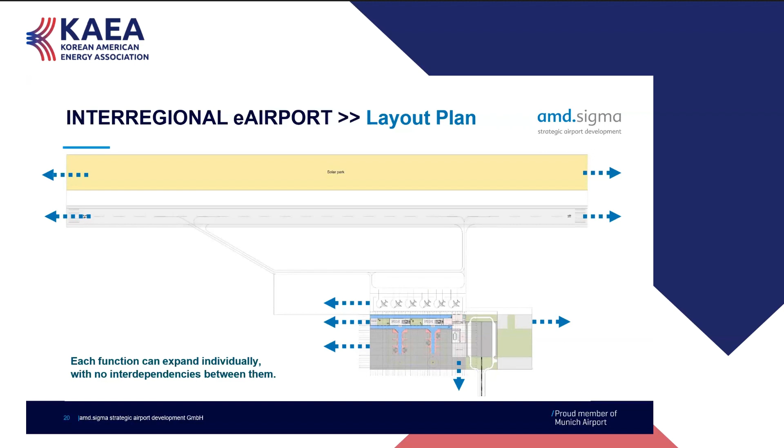Next slide please, and that's how it looks. You have a big solar park, a runway of about 1,000 meters, and on the bottom you see a terminal building that combines a vertiport and an airport. That's the first one that has ever been designed this way worldwide, so we're quite proud of it. To the right, you have either an airport city or a cargo city, because we believe you can have passengers during the day and cargo during the night, and you get a much better business plan with that.

So that's pretty much how it could look, that's basically quite a lot. But you can start small. You can start with half of the terminal building for the passengers, and also start with only very little for the cargo, and just go piece by piece and let it grow.

So we have about 12 eVTOLs that feed the passengers from the big city into this airport, and we have 6 positions for electric planes that can be 9-seaters, 25-seaters, up to 40-seaters. That can host anything between 300,000 and 1 million passengers.

So last slides, there are a few impressions from the inside. Maybe next slide.

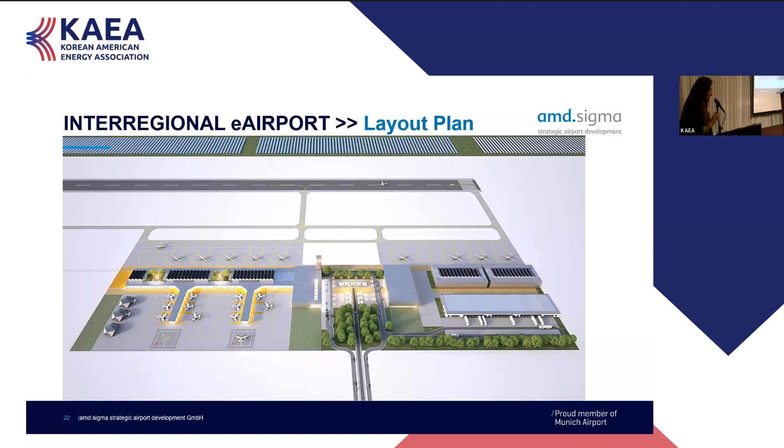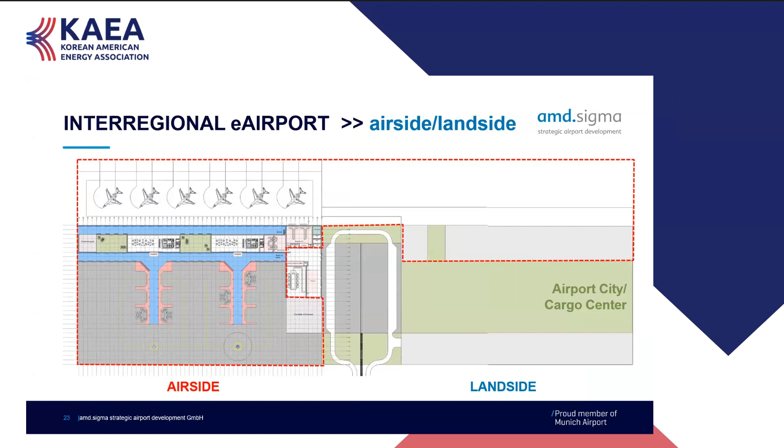Next one, please, that's just the diagrams. Maybe if one is interested, you can get the presentation later and look at it. Next one, please.

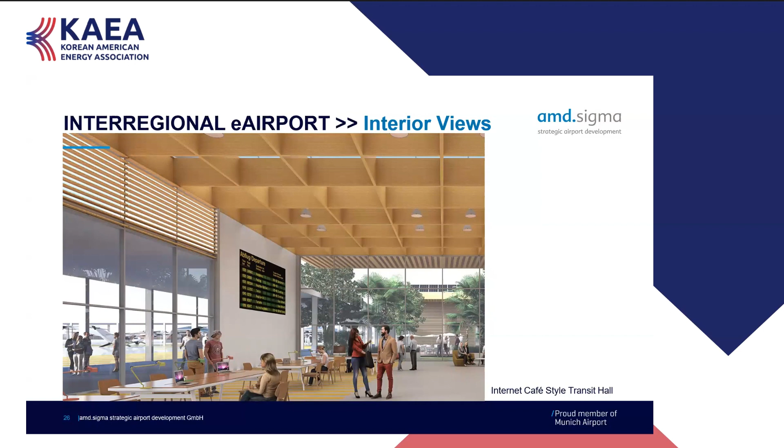Next one, I just want to show these interiors. We want to build this as a wooden construction. It's all on one level. There's no escalators, no elevators, no pushback. It's basically a very simple building with inner yards that are green, with open spaces and natural ventilation. Next slide, please.

And that's basically my last slide. So basically, that's how we imagine this terminal to be, an open space that looks more like an internet cafe than a conventional terminal. So that's pretty much what I have to say.

I hope I'm not too much over time. I'm sorry to talk so much. I hope you enjoyed it. And if there's any questions, please ask.

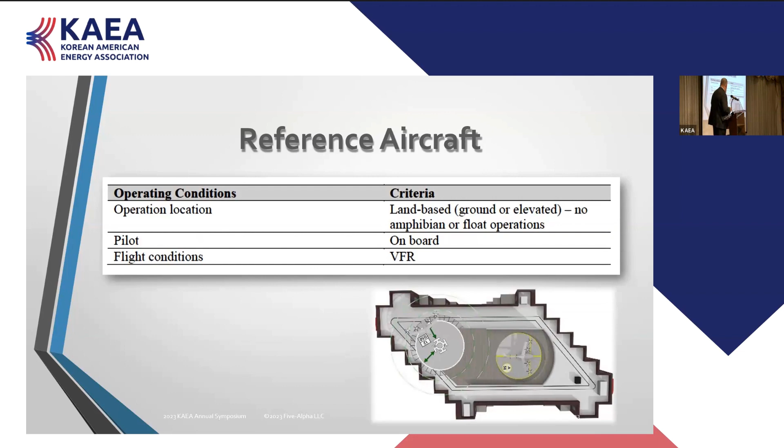If you don't know what hover out of ground effect means, it's a performance classification for helicopters under the certification requirements in Part 27 and Part 29. When a helicopter or eVTOL is close to the ground, the airflow gets resistance, and as that resistance pushes back, it requires less performance from the aircraft to hover. Once the aircraft leaves that area, it gets into what we call out of ground effect—rule of thumb for helicopters is 1.5 times rotor diameter—and you're into a higher performance requiring area for flight.

So that's one of the things we pointed to in the eVTOL: if you're landing out of ground effect in normal operations, it must be able to have that performance level, quantified as being able to take off vertically and land vertically.

The downwash, outwash is something we're looking to measure because we're not sure what that is yet—what's the velocity from the aircraft itself, and what's the impact on its environment? There's also the wake turbulence that the aircraft produces. We know heavy jets produce wake turbulence that we want to avoid, but there's also wake turbulence created by helicopters that you don't want to fly through.

The rule of thumb the FAA came up with is about a 60-second separation for light helicopters and about a 90-second separation for heavy helicopters, again using that 12,500-pound threshold. We don't know what that is yet for eVTOL—we haven't studied that.

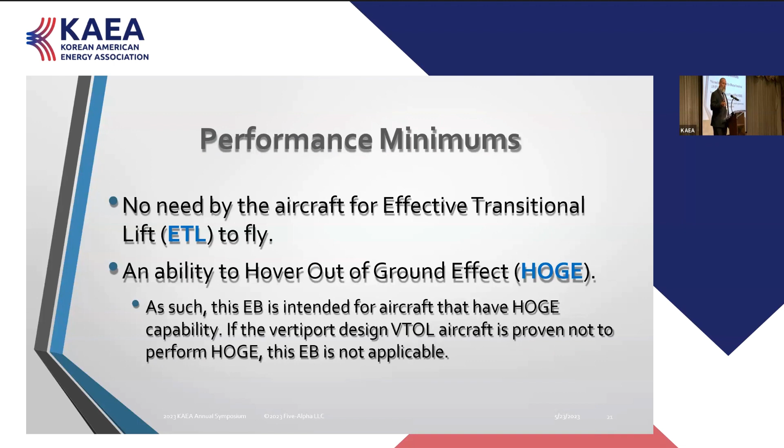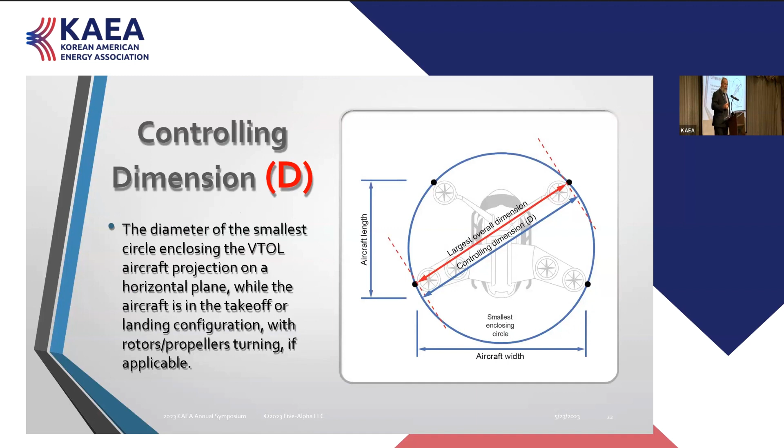There's a ratio that we use in helicopter design for a heliport. The main rotor versus overall length is a very consistent ratio. That same ratio does not exist in the vertiport world or in the eVTOL world. Performance minimums, effective transitional lift and hover out of ground effect are the two primaries they point to. This is a new acronym, controlling dimension. It's basically equates to what we refer to in ICAO as D, or overall length. So this is now the new D. We used rotor diameter a lot of times in the past, but now it's controlling dimension.

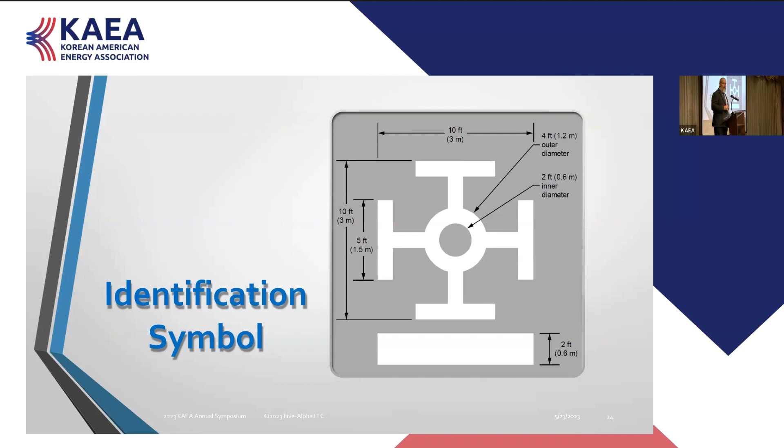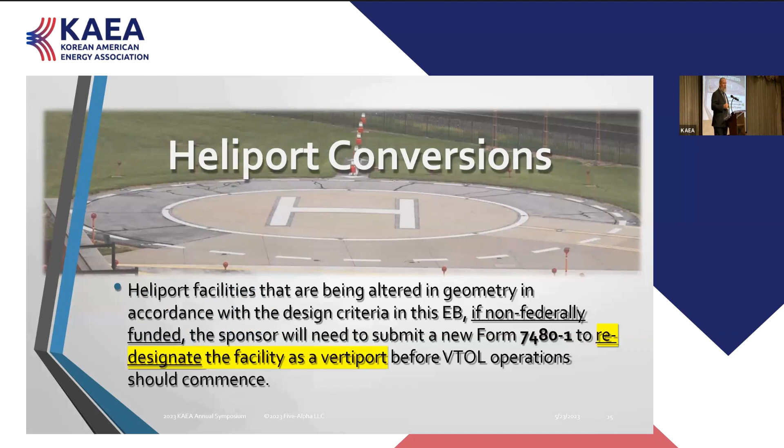This is the original identification from the 1990s for heliports. There's testing going on right now at the FAA Tech Center to identify if this is the right symbol for vertiports. We talk about conversion, redesigning. That's a criteria in the engineering brief that speaks to that. Again, I said it's challenging to do that.

Charging electricity. One of the groups that wrote the section in the FAA engineering brief that I would pay very close attention to, if you're not familiar with it, it's called NREL, National Renewable Energy Laboratories. They're actually a government agency out of Denver, and they do a lot of work in the renewable energy world and have written a lot of some of the better white papers in this space for charging.

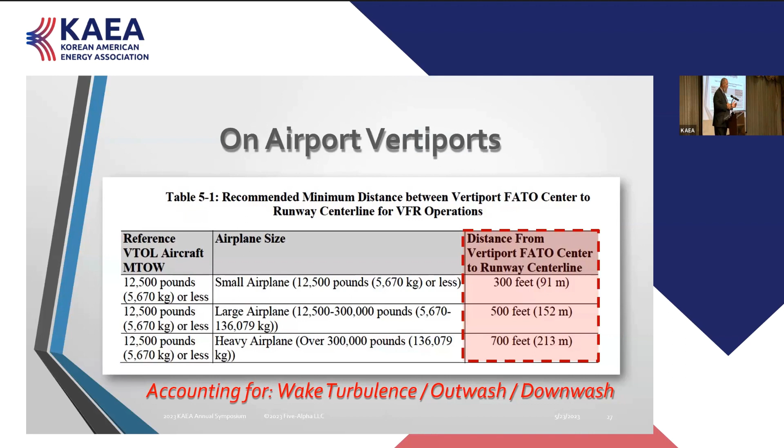One of the things at airports, or even at airports and heliports, is what's the separation between the aircraft. This is where we get into wake turbulence separation for aircraft between lights and heavies. We don't know exactly yet what the eVTOLs will produce for wake turbulence.

Benefits of existing airports: existing clear airspace, access to electrical grid, room to grow and expand, capacity for high throughput mass transit access points. Your average heliport doesn't have that.

Downwash, outwash. We're doing research on that right now. Working with Vertiport, we're actually getting ready to kick that off here pretty soon. Real quick, other standards.

ASTM International has a Vertiport standard, published August 2022. National Fire Protection Association—I'm the chair of NFPA 418, which is a heliport, now heliport Vertiport standard. We just finished our last go around. Expect that to be published as early as December 2023, but as late as June 2024.

That'll give fire standards for municipalities. International Code Council—I haven't seen anything from this group yet. They're the ones that design building code and fire code. We need to engage this group because the municipalities lean on this for heliports, and will lean on it for vertiports.

New group out there that I worked with for the last couple of years, designing a standard for illumination, IES. This is not the landing area—this is the surrounding area, the parking area, the refueling area, the loading area for cargo and things like that. But the IES, it's an ANSI standard.

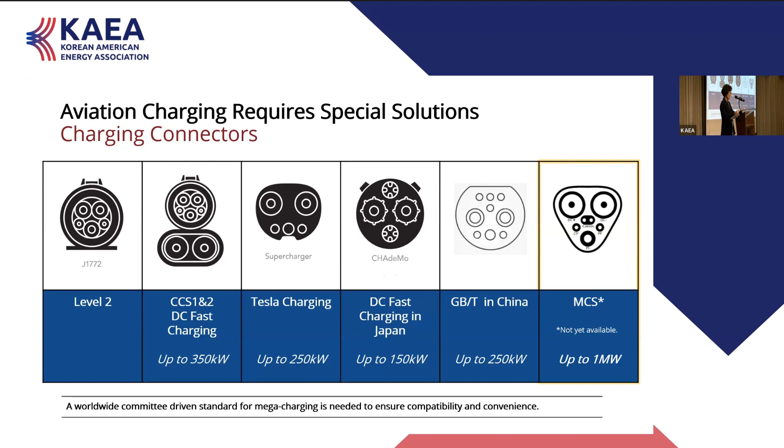Aviation charging requires—next slide.

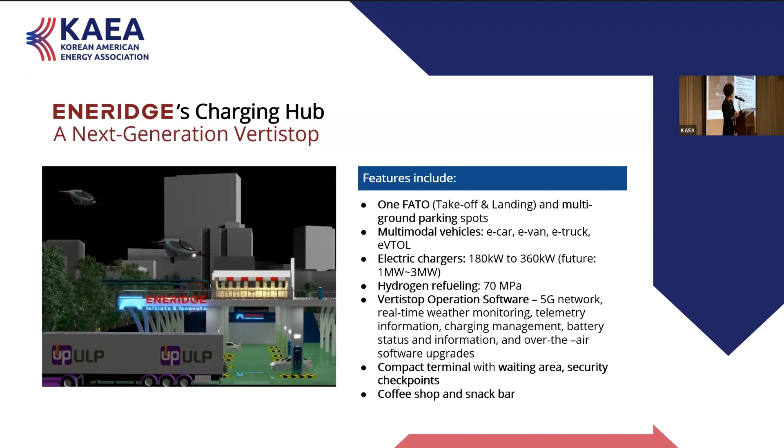So please watch the video—I can show you the video.

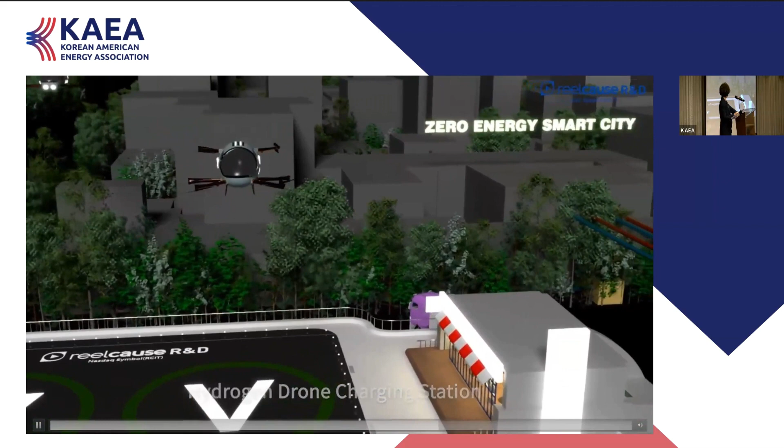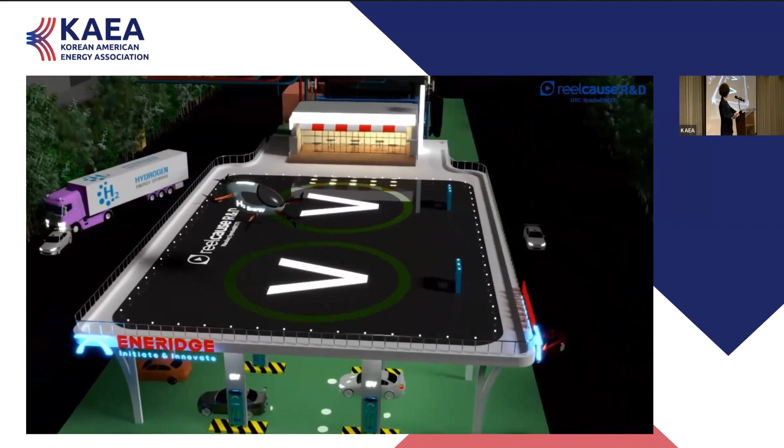So with one eVTOL vertiport pad, and then we're going to have a ground parking lot with the EV charging station. With the power sharing, we have dynamic load balancing function. We can utilize the existing electricity capacity for eVTOL and the ground level charging station altogether for good utilization.

The key components for charging stations are electric charging hardware and hydrogen refueling station. We will provide a DC fast charging station, currently up to 350 kilowatts DC fast charging stations are available, but high power charging stations will be developed and available for airplane charging in the future. And we can provide a hydrogen power charging station.

And one more important component is the Vertistop operating software platform. It should be 5G network connected and provide location of charging station, charging status, real-time weather monitoring, telemetry information, charging management, battery status information, and it should have over-the-air software updates.

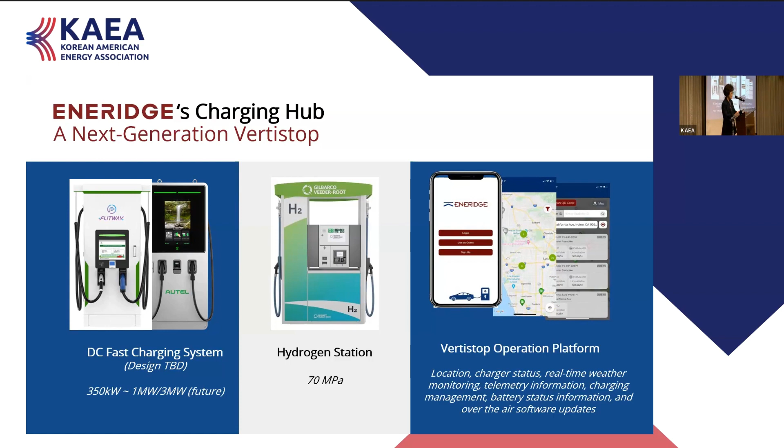So Eneridge's business model is that we minimize the initial investment, but we will maximize the revenue from diversified revenue streams. We will minimize our initial investment by utilizing a Vertiport grant program and charging and refueling station rebate and incentive programs from local government or utility companies, a tax credit of up to 30% of net project cost, and food and beverage store lease payment.

And then we will maximize our revenue from diversified revenue streams. The revenue comes from charging and refueling aircraft and ground vehicle charging stations, carbon credit trading based on dispensed kilowatt hours from the hydrogen refueling station, aircraft facility usage fee for takeoff and landing, passenger airport usage fee, net metering service for excessive energy exporting to the local community or other network airports, food and beverage store lease payment, and other income from advertisement, etc.

Eneridge's roadmap for our EV Vertistop: in 2025 we'll do a pilot project. In 2026 to 2030, we will deploy 10 Vertistops in the United States. And in 2031 to 2040, we'll deploy 300 Vertistops in the world. Thank you very much for listening to my presentation.

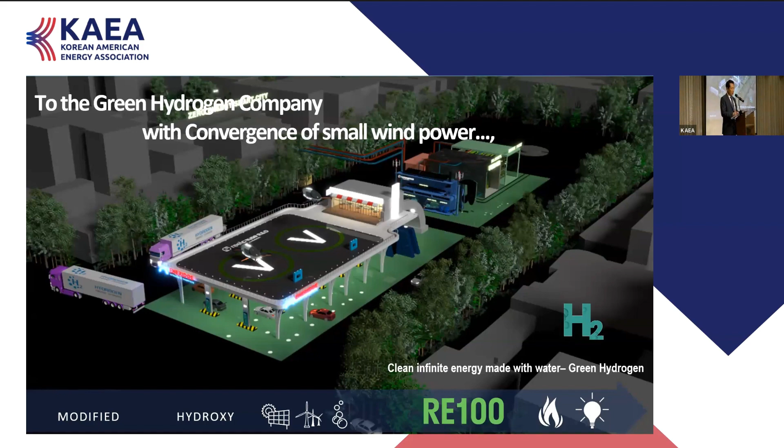So this is the model that you saw. This is where we provide either hydrogen or electricity so that you can move forward with your projects. Let me explain our entire system in a nutshell.

We developed a low power water electrolysis system based on small wind power to generate HHO gas, known as brown gas, and further developed an HHO gas burner that generates and burns its own HHO gas through pyrolysis. I'm sure some of you know about pyrolysis. Through this process, we developed an eco-friendly power generation system without producing carbon dioxide or NOx.

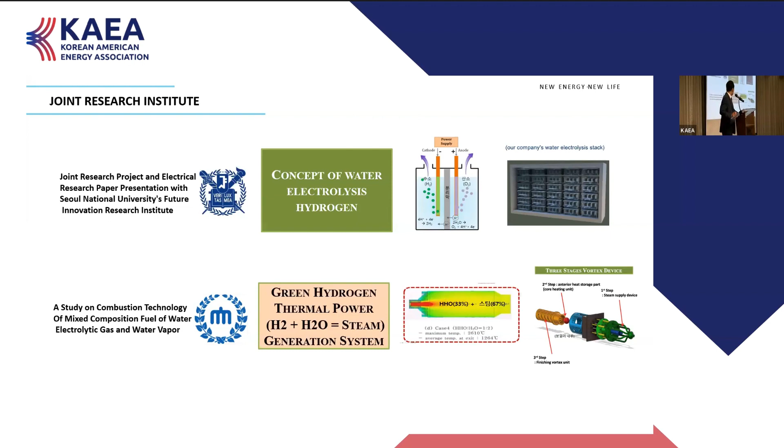Allow me to introduce our key technologies. Our generation system uses an industry-proven and typically used steam turbine generation system, which generally uses fossil fuels as its energy source. As you're aware, this popular system has been verified and used for over 100 years since the Industrial Revolution. The only difference is that our system fires up HHO brown gas as the fuel to generate steam in high heat. This is our green hydrogen cogeneration system.

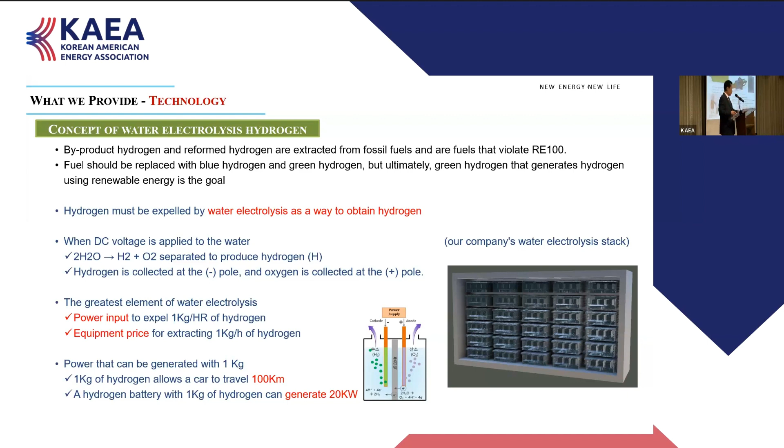Our key technologies are divided into 3 areas. The first technology is a water electrolysis system, similar to the popular alkaline method. Our key technology that sets us apart from the alkaline method is that our system does not use highly expensive metals and KOH solutions in the process.

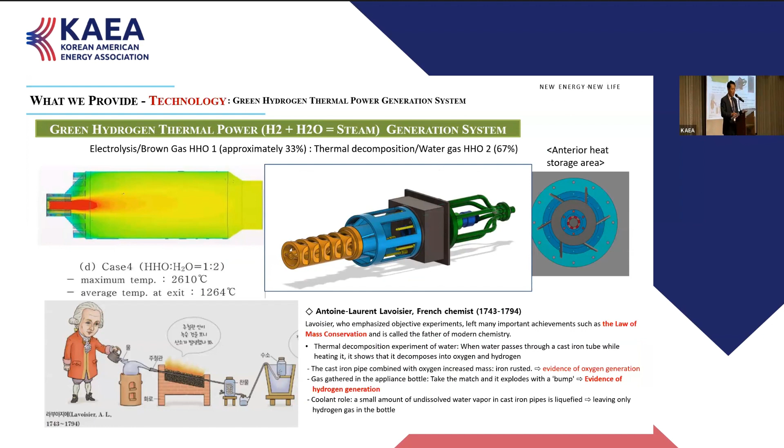Our water electrolysis system only uses water and stacks to produce HHO gas. Our stacks are made from proprietary new graphene compound materials. This is our patented and innovative technology in water electrolysis. This system is jointly researched and co-developed with Seoul National University's Future Innovation Research Institute.

Through this system, we were able to minimize required electricity down to 24 kilowatts per hour to produce 1 kilogram of hydrogen. On average right now, 1 kilogram of hydrogen is produced using 50 kilowatt hours. This new water electrolysis system will allow us to mass produce HHO gas to reach our future goal of a best case scenario to attain approximately 20 kilowatts per hour from the current 24 kilowatts per hour to produce 1 kilogram of hydrogen. In other words, we're improving our efficiency.

This is our second patented core technology. It's called the HHO burner system that heats the anterior heat storage section located inside the boiler to generate additional HHO gas through pyrolysis using recycled steam supply. This technology is co-developed through joint collaboration with Chungnam National University.

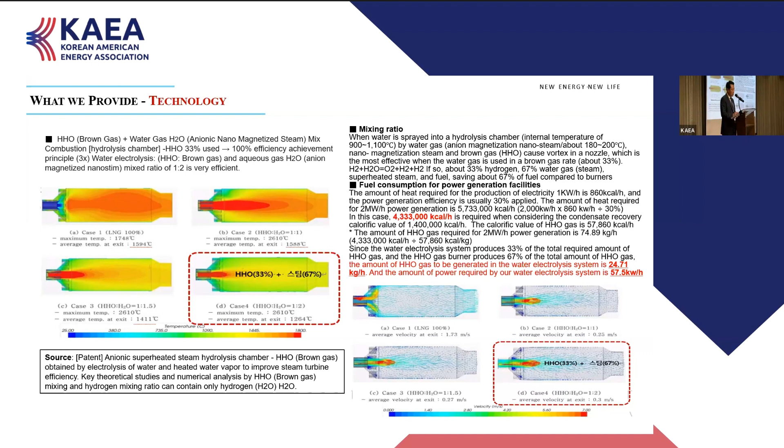Next. Through our first water electrolysis system and additional HHO burner system, we are able to complete the third and final eco-friendly green energy generation system. With our innovative technologies, we can provide green hydrogen and green electricity to all of our partners to eliminate carbon footprints on our planet. Thank you.

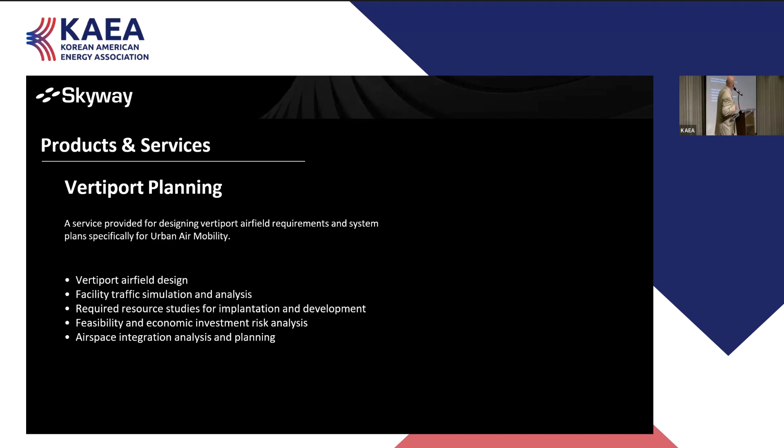So I think I'm going to just very briefly talk about this. We all understand why infrastructure is needed. We are behind schedule for developing the infrastructure we need so that when these aircraft are certified and ready to operate, we have all of the facilities ready for them.

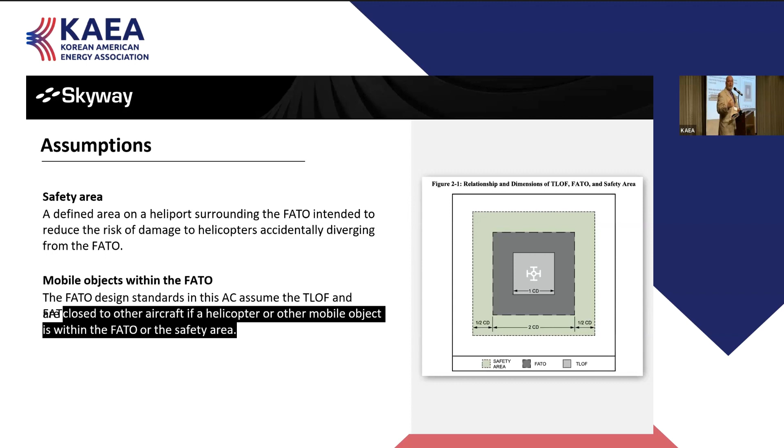The only thing important here is that when there is an aircraft within that safety area that is on that FATO, it has just landed or is about to take off, there can only be one. So that also affects the capacity. You can't have another aircraft hovering in to land on a FATO while another vehicle is already landed on that FATO. That's one of the assumptions I needed to make for developing the capacity analysis for these vertiports.

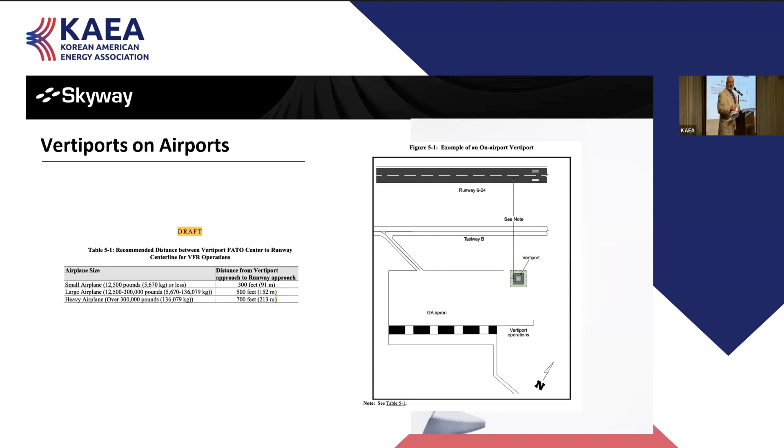For passengers to decide to use the UAM system, this trip must be faster and more convenient than the alternative. Nobody's going to pay more money for a trip that takes the same amount of time, or that is way too confusing. So the highest level of service that we as planners and operators of vertiports can provide is to get passengers onto the aircraft as quickly as possible and get them along their trip as fast as possible. Sure, there are other considerations. Maybe you don't want to fly directly over a neighborhood, so you might go 10 or 15 seconds out of your way to avoid that. But if you're going 5 or 10 minutes out of your way just to avoid overflying a highway or a community, then you need to reconsider your priorities, because once the trip duration takes longer than the alternative, you have killed that route and that business.

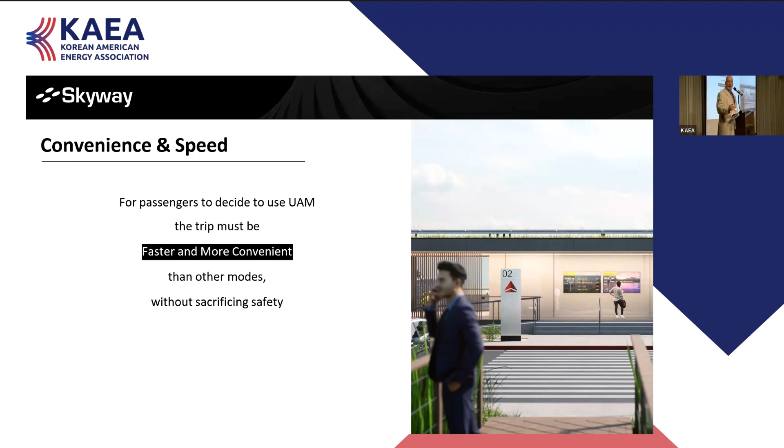Will this put extra work on the existing air traffic control system? The answer is yes, certainly at first. These vehicles are going to be piloted, so there's going to be controllers talking to pilots. They're going to be taking off on normal runways. Eventually, however, the system's going to be fully automated, so you would assume no. But the answer is that yes. Sorry, I think we may have skipped one.

Even when they're fully autonomous and operating at an existing airport, the vertiport and the airport have to operate in the same direction. So somewhere there's going to be a controller, whether he's just flipping a switch or calling down to the vertiport operator, there's going to be some coordination. That will always be true.

Now we're going to talk about use cases, first and last mile delivery of passengers. I've already mentioned United Airlines buying 700 of these aircraft - this is what they're going to use them for. They're going to fly you into a major airport on an existing legacy jet, and then you're going to get off and want to get on an urban air mobility vehicle to finish your trip. Maybe you're going home, maybe to Disney World, maybe to the Super Bowl, whatever that is.

That first and last mile delivery of passengers is a major use case, and I think it's going to be one of the first early adopters because the airlines have invested so much money in this. From a planning perspective, this is interesting and important because the flight schedule for the urban air mobility vehicles is going to be very similar to the flight schedule for the airline operating that service.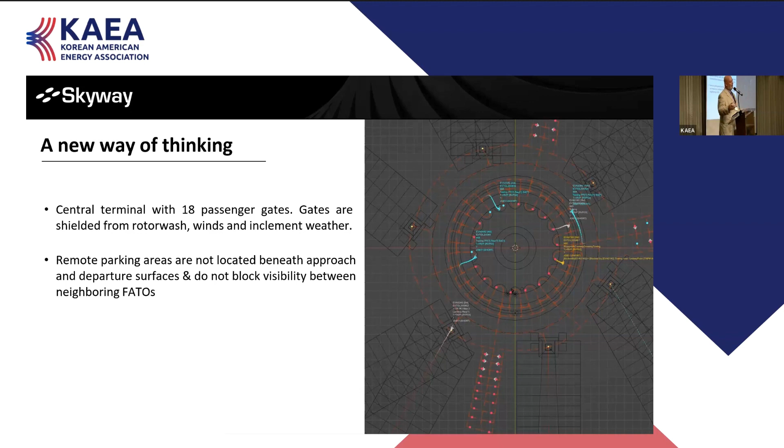Next slide. And this is what this looks like when you lay out a vertiport with a terminal in the center to minimize the taxi times. Gates are wide at the airfield side because I lay out a vertiport so that the aircraft can come in and turn. Halfway through the turn, he unloads and loads up his passengers. If you simply pull up to a terminal, face up to the terminal, then you got to back out or have the aircraft tugged, and we're trying to avoid all of that manpower. So wide on the air side, getting very narrow to the land side, because the gate doesn't have to be very large. The aircraft only holds 4 people. So even if the gate held the next 3 flights worth of people, we're still talking fewer than 20 people. And I think that's it.

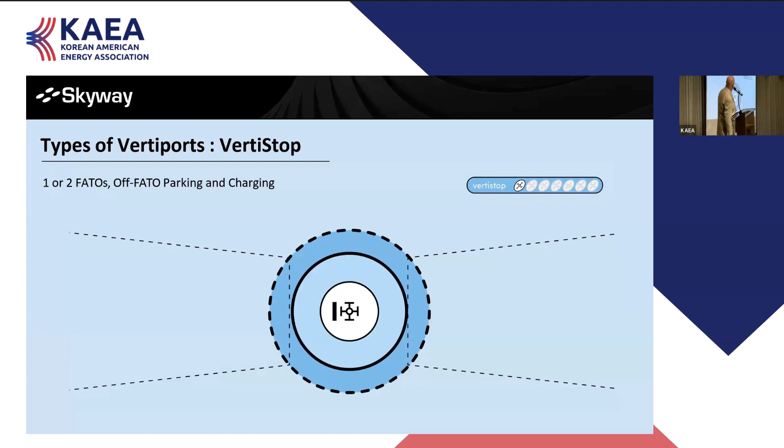Next slide. Oh, I'm going to skip through a lot of these. So let's skip through until, just go. I'll show you when to stop.

Right here, this is the Vertistop. We talked about this earlier. This is the smallest possible vertiport. But how big is it? Well, I'm showing it at 3.1 acres. If you put a fence line around the entire, what was the heliport protection zone, which is not in the engineering brief now, but maybe. It's basically an area large enough so that if a kid was sitting at the end of that fence line, he'd have to throw a basketball 50 feet in the air in order to get above the aircraft.

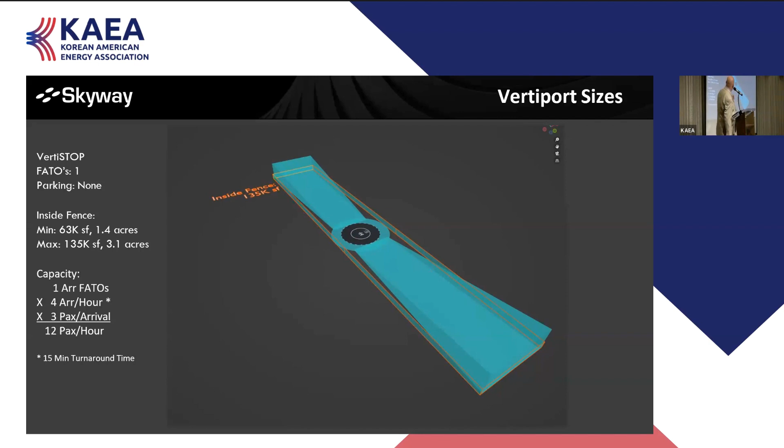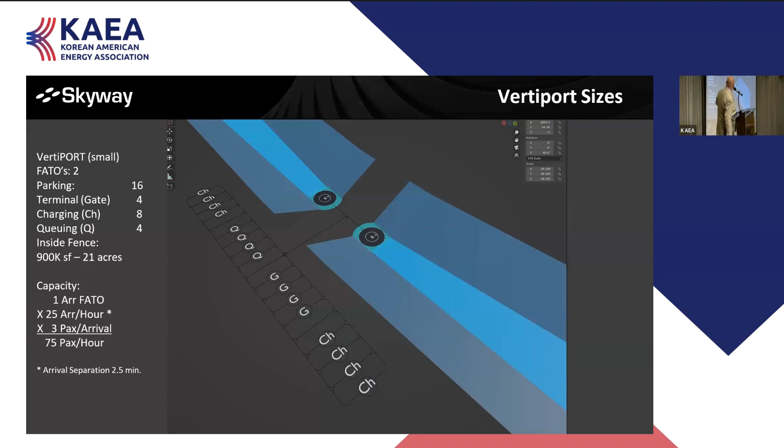Let's run through to the next one and keep going. This is just showing that I need more gates. One more - if I include the airspace surfaces, that's what that looks like. This is now 21 acres, almost 1 million square feet.

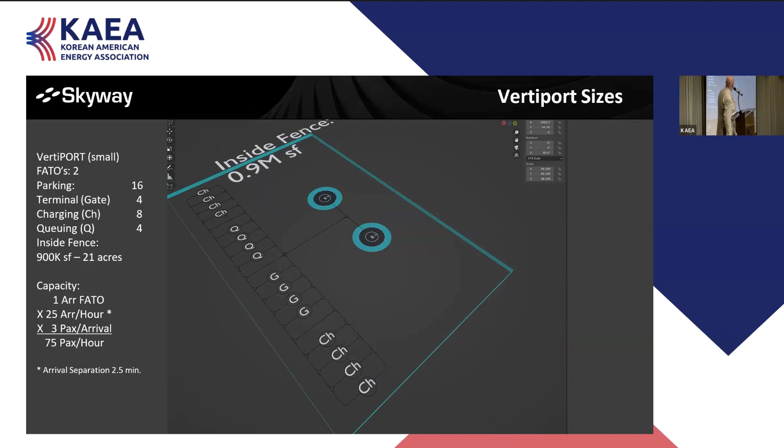This is only 2 FATOs, 1 arrival, 1 departure. Keep going - now let's go to 4 FATOs, 2 arrivals, 2 departures. Now I've introduced the terminal building. Everything's smaller than this - I didn't necessarily need the terminal building. Now I do, because I've got 7 passenger gates alone.

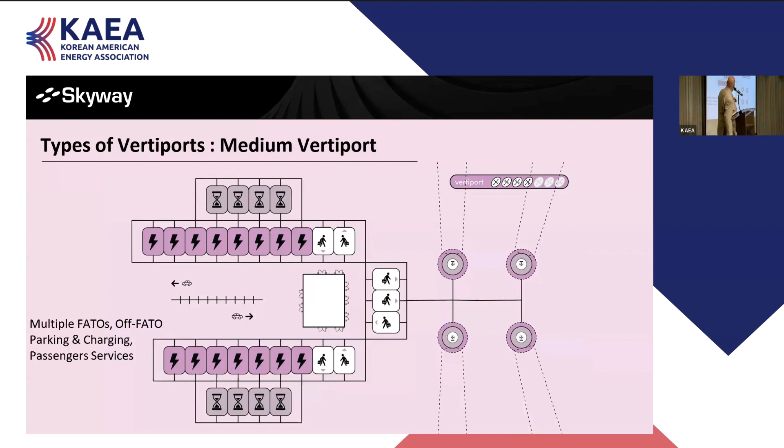And next slide - I had 15 charging spots, 8 queuing, 44 acres for a 4 FATO vertiport.

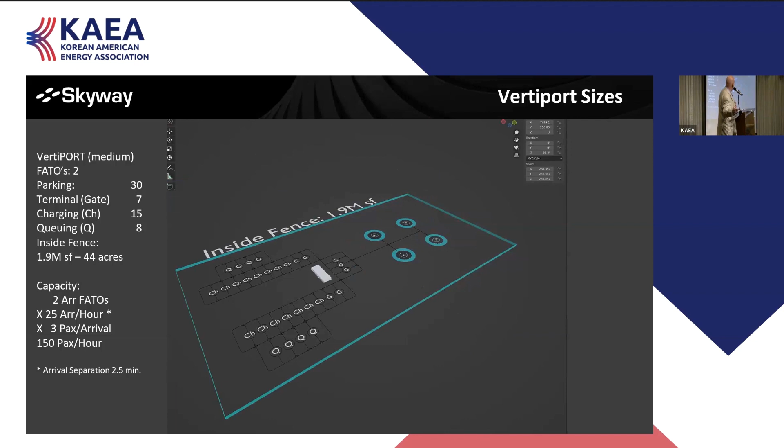Next one, last one we talked about - go ahead and skip through these couple of slides. We can move surfaces. Next one, we're going to go to the biggest possible - what we talked about earlier as a Vertihub. One more - here's that centrally located terminal.

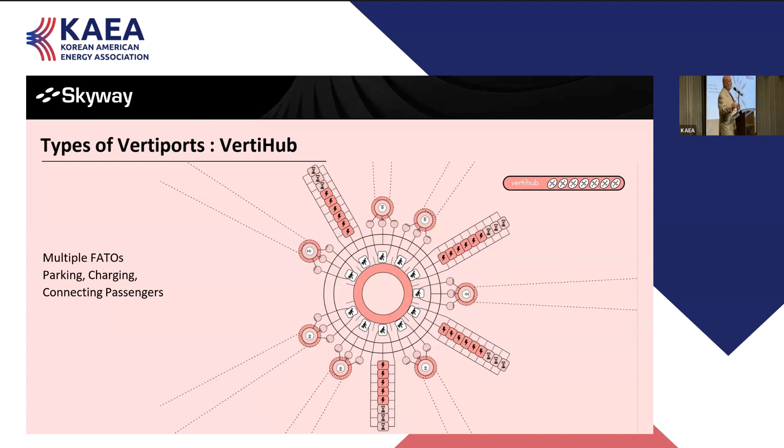7 FATOs around it, 4 for arrivals, 3 for departures, because we think it's going to take longer to land than it is to take off. I think we'll get to the total acreage - we're up to 87 acres. So keep that in mind when you're planning these vertiports at your airports.

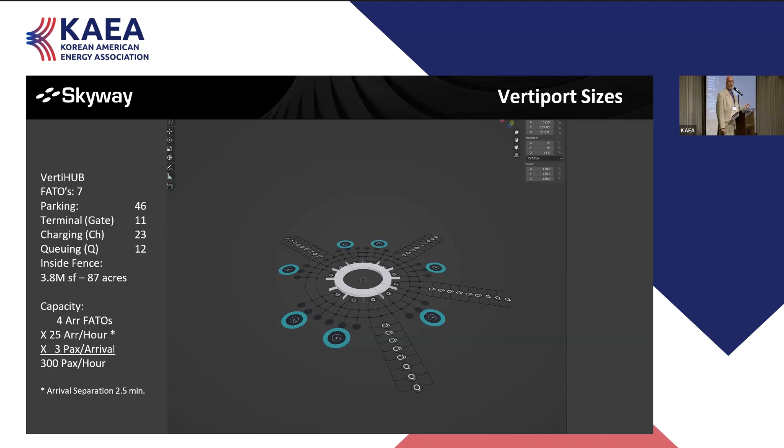One more, I think we'll finish us off. Keep going through these. Finally, a Vertipark - a special type of vertiport, not meant for passengers at all. This is a vertiport meant just for the aircraft.

If you Google the word vertiport and look at the artist renderings, you never see enough parking. You certainly never see 200 parking spots, but that's what you're going to be bringing into your community. So if your vertiports aren't big enough to hold the parking overnight in storage, then by putting in a Vertipark in your community, you can have them all charged in one location overnight. The charging will be less expensive because you're delivering the electricity in bulk.

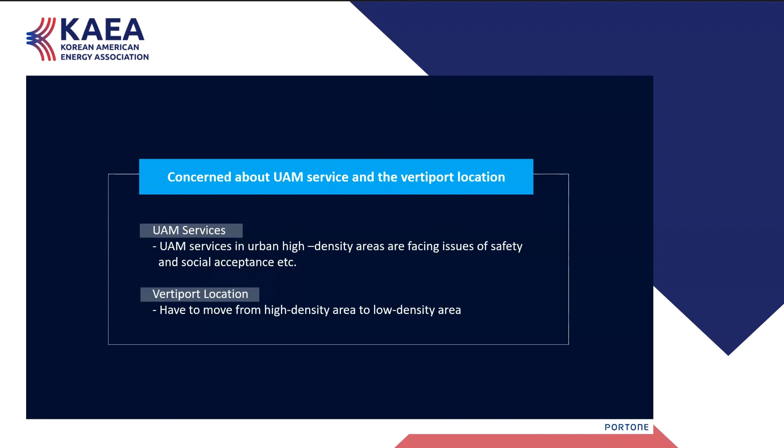There are many issues related to UAM commercialization, but today I will talk about 2 major issues. The first: there are many tall buildings in the cities of Korea, so if we start UAM commercial service in the city, safety cannot be guaranteed, and it's difficult to reach social acceptance. Because of this, the Vertiport is also in a situation where it has to move to low-density areas, not high-density areas. This is a problem common to many countries in the early stage of UAM commercialization.

And the second issue: if Vertiport moves to low-density areas, the decreasing attractiveness of the Vertiport business means revenue may not be secured, making it difficult to provide continuous UAM and vertiport service. As mentioned, if UAM commercialization starts in a low-density area due to safety and social acceptance concerns, it may be difficult for the vertiport business to maintain a sustainable business.

To solve this problem, we need to find alternative locations with sufficient demand. Maybe tourist destinations could be a new alternative. For vertiport operators, tourist destinations have good conditions to form a nationwide vertiport network. Local governments interested in the UAM industry can lay the foundation for the UAM industry by building vertiports in tourist destinations, and tourists can be the best customers in the early stage of UAM commercialization. Building vertiports in tourist destinations is a win-win for vertiport operators, local government, and tourists.

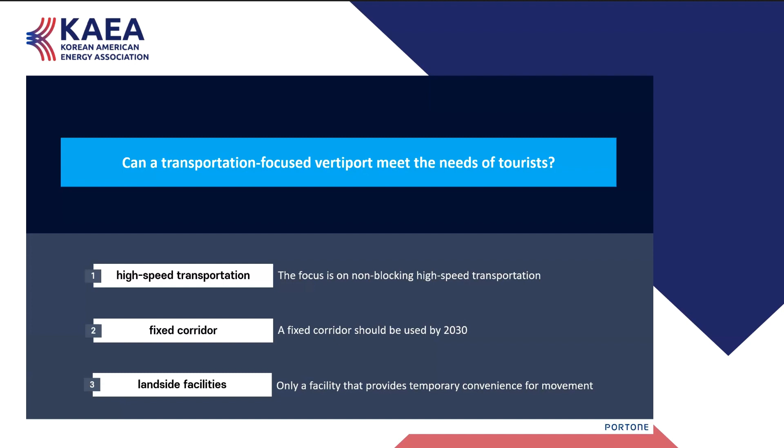In this situation, T-port may be an alternative. T-port is a vertiport built in a tourist destination. Let's see how T-port is different from other vertiports.

T-port has a difference in vertiport operation. Tourists demand a moderate speed aircraft that can enjoy sightseeing as well as moving quickly. In addition, T-port needs an aircraft that can carry many customers. Therefore, T-port must be a space where eVTOL and eSTOL are operated together.

Next, T-port has a difference in corridor and airspace. According to the K-UAM plan, a dynamic corridor network will be applied after 2035. However, it is necessary to consider a dynamic corridor network within tourist destinations where T-port is located. T-port should play a role in airspace control of the entire tourist destination, not just around the vertiport.

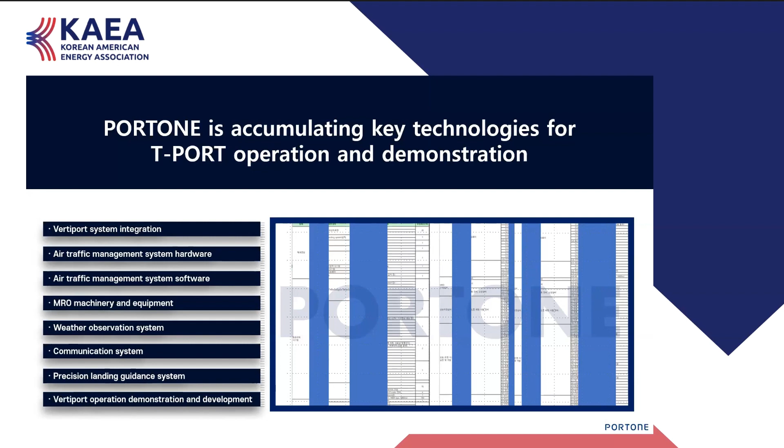Now, PORTONE plans to build 15 to 20 Vertiports across the country by 2028. These Vertiports would include both Vertihub and Vertiport. Apart from this, we are discussing the Vertiport project with local governments from the perspective of creating a future industry.

We also aim to be one of the top 10 Vertiport companies globally by 2030. To do so, we will work on making a standard Vertiport in 2025, along with securing the operating area of Vertiport in 2023. And in 2027, we plan to expand overseas.

To achieve this goal, we have a team of 3 C-level directors and an external advisory board consisting of 8 members with diverse expertise and perspectives.

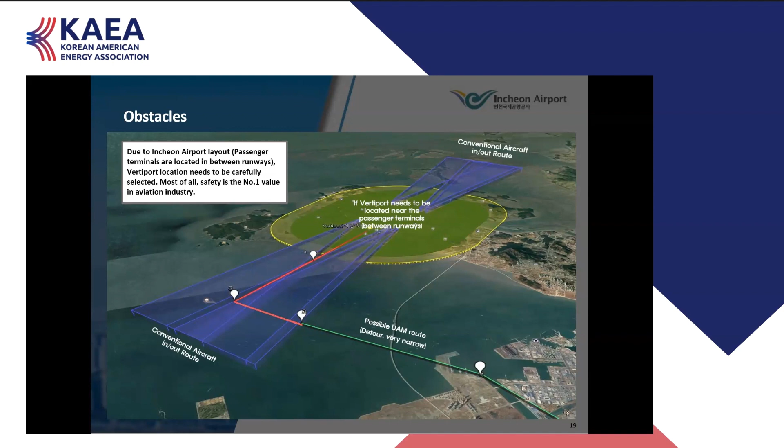To provide a more detailed comparison, let's explore the two options in more depth. Case one: in this scenario, the vertiport would be located on the east side of the runways, eliminating the need for eVTOLs to cross the runways or detour over the ocean. The primary advantage of this option is that it minimizes interference between conventional aircraft and eVTOLs. Additionally, air traffic control would be more convenient since the routes of eVTOLs and aircraft would not overlap.

However, the main drawback is that this location is far from the passenger terminals, which could potentially cause inconvenience for passengers. In case two, alternately, placing the vertiport near the passenger terminals would significantly reduce the time and energy required for passengers to reach the vertiport. This option prioritizes passenger convenience.

However, it poses safety concerns regarding interference risks between eVTOLs and conventional aircraft. Additionally, air traffic control would be more challenging and riskier, requiring various other solutions to effectively separate eVTOLs from conventional aircraft. Both options have pros and cons, leading to a dilemma for us in decision-making.

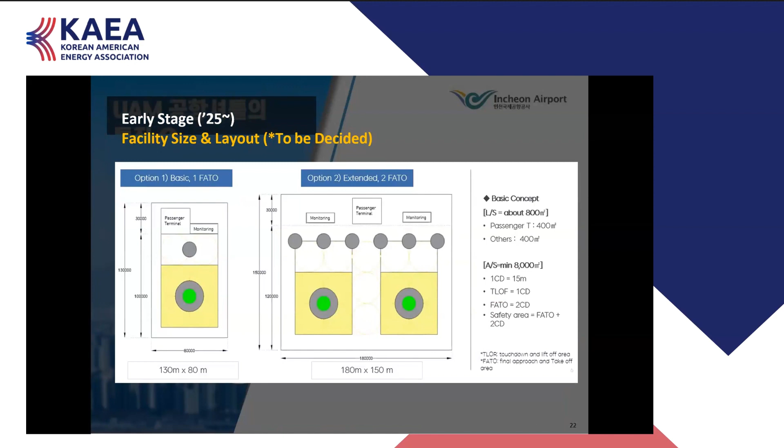The vertiport facility in the early stage would consist of takeoff and landing sites, small passenger facilities, and a monitoring system.

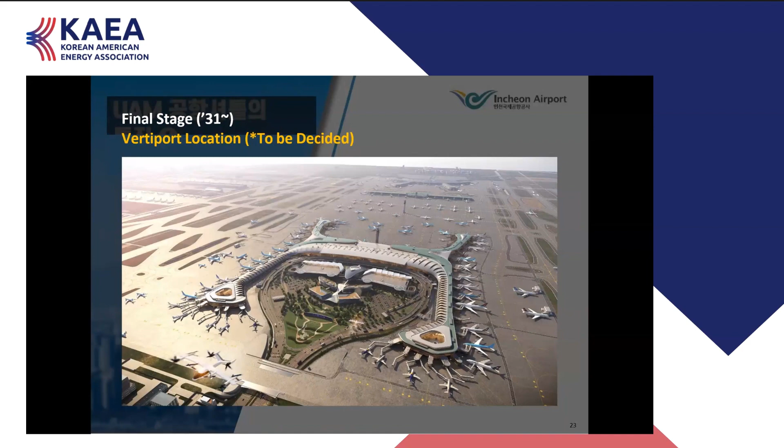The concept design for the Terminal 2 vertiport proposes locating the facility above the short-term parking lot located directly in front of the terminal. However, it is crucial to emphasize that safety and technological challenges must be resolved first.

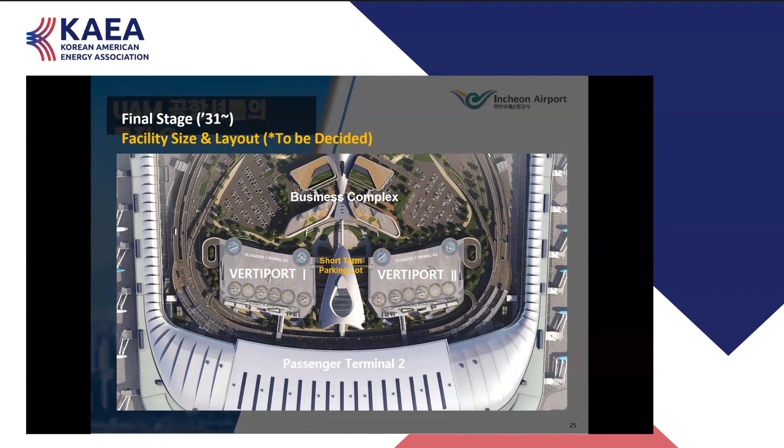This is a potential facility size and layout with several FATOs and aprons.

While final decisions on vertiport location and infrastructure are not yet determined, Incheon Airport is preparing for UAM operations, including implementing a helicopter airport shuttle service.

Given the current challenges in UAM operations, a viable alternative is to utilize helicopters. By starting with VTOL aircraft, such as helicopters, and transitioning to eVTOLs once they are commercially available, the groundwork for UAM services can be established.

Collaborating with a company named Moviation, Incheon Airport is working together to establish UAM services and infrastructure for existing VTOL aircraft.

Initially, the shuttle service will focus on transportation from Seoul to Incheon Airport, with plans to extend to nearby tourist destinations.

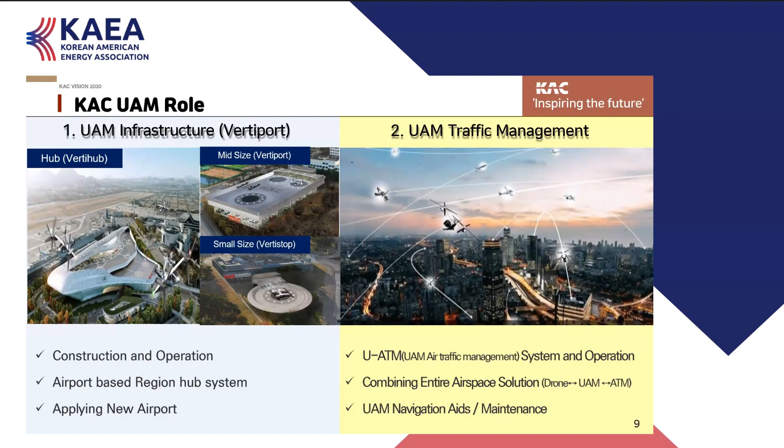As everybody knows, UAM arose to solve urbanization and traffic problems inside the city. But can UAM actually solve urbanization and traffic issues?

Is it possible to realize the movie of the Fifth Element? Because every media introduced UAM as air taxi and fully automated flying cars, the public thinks UAM will operate like this.

But there are hundreds of hurdles for a fully automated UAM. We have to consider economy and selection factors, all of the legal and regulations, etc. Also for infrastructure, I'll talk about the hurdles for infrastructure in the next slide.

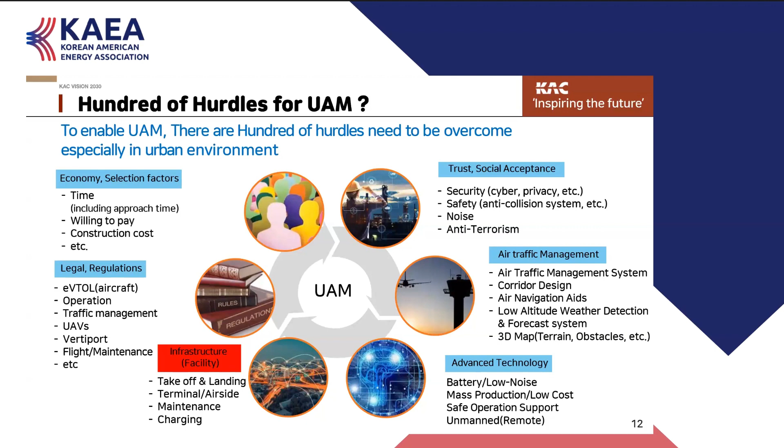So let's think about this. UAM is not a fully automated flying car, but it can operate as an electric VTOL aircraft like electric helicopters. It will be possible in the near future.

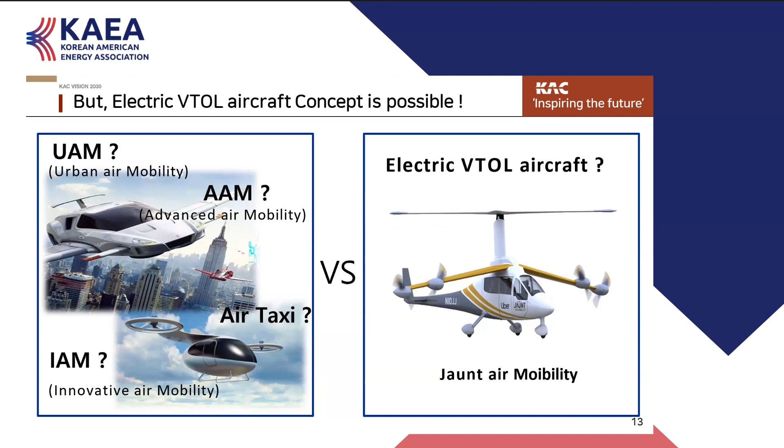For the initial phase, the Korea Airports Corporation prepares UAM for regional air mobility. UAM will be the effective way for regional transportation, since the transportation system is very well developed in the Seoul metropolitan area, and in the initial phase the ticket price will be comparatively higher than other transportation modes. Regional transportation will be the most effective way to apply in South Korea.

We also think the airport-based RAM service can be a complementary airport access transportation, and can create new point-to-point tourism demands in the future. As I introduced in the previous slide, we are now designing and preparing new airports, and we're going to construct vertiports at all the new airports.

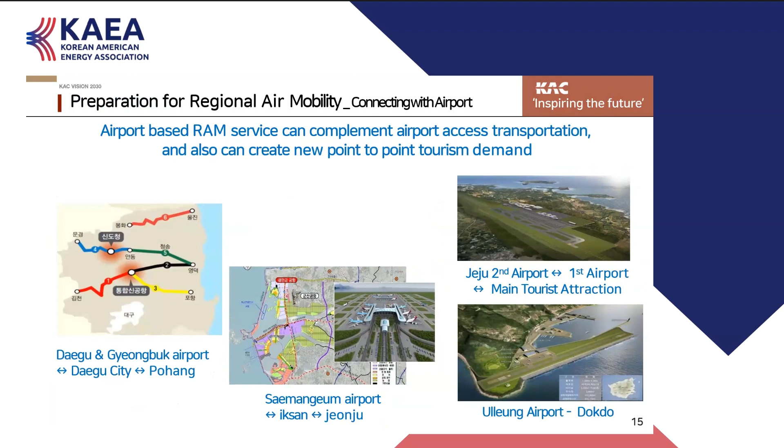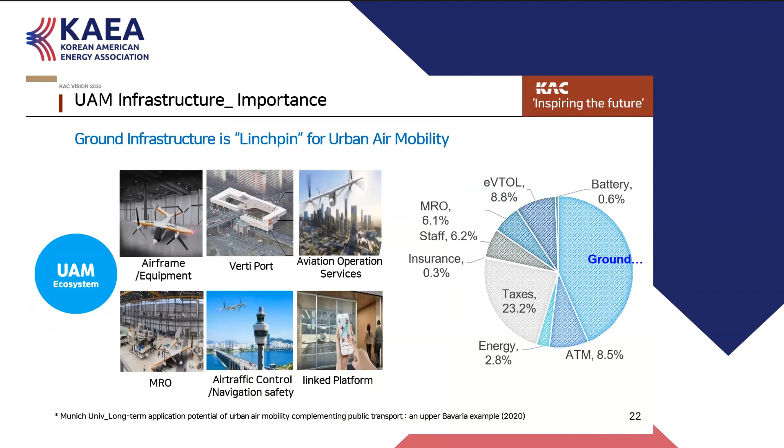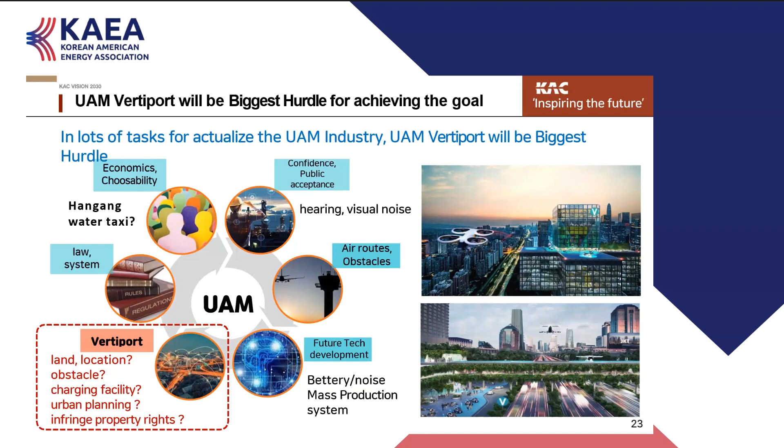We are now preparing vertiport operations in South Korea, and we found many hurdles to construct and operate the vertiport. We have to select the land and location, consider surrounding area obstacles, supply a large amount of charging facilities, and consider urban planning, so we have to cooperate with local governments. We also have to consider whether vertiports can infringe property rights, because when we build vertiports there will be an obstacle clearance surface nearby. Buildings next to vertiports cannot build high, so they could sue the vertiport operators. This is the most important factor to consider when operating a vertiport.

Vertiports have to converge all transportation, so the vertiport has to consider connections with other transportation, including future ones.

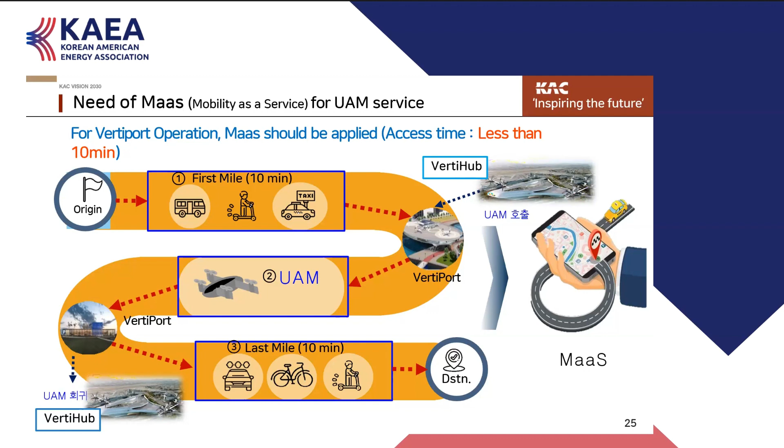The MaaS service is critical for UAM operations. Everybody knows about this slide, so let me skip it as well.

Vertiports, as MaaS stations, will be the core of future traffic infrastructure in the city. We are also considering this for new hometowns in South Korea, not only the current urban core areas.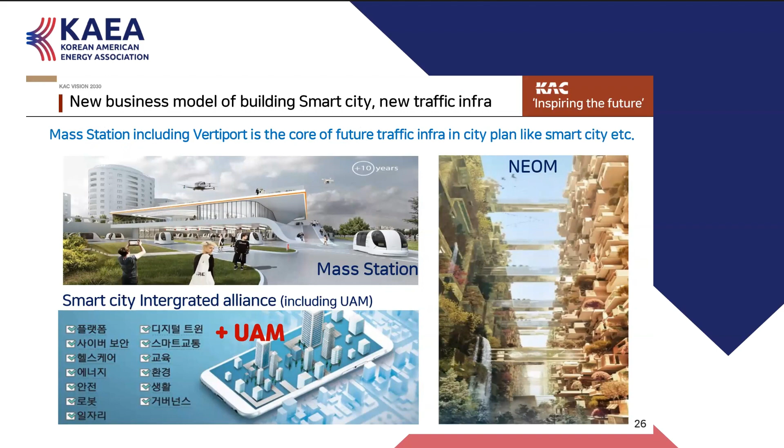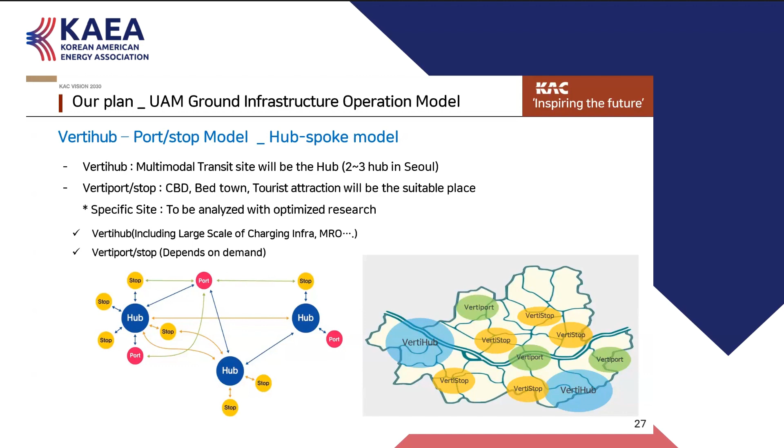We think the hub, similar to the hub-and-spoke model in legacy aviation, will also be effective for the UAM industry, because it's really hard to secure land in the urban core area, but we need a large land to park for overnight eVTOLs, for MRO, and for charging stations. So we think we have to centralize all of these functions at the Verti hub, and then the other spots can lessen their burden for these functions, so they can be constructed depending on their size, land size, demand, etc.

We also set levels for the vertiports. The biggest one is hub, the mid-sized one is port, and the smallest is stop.

I'm really glad to introduce our project. We are now preparing the Gimpo Verti hub in front of Gimpo Airport's domestic terminal.

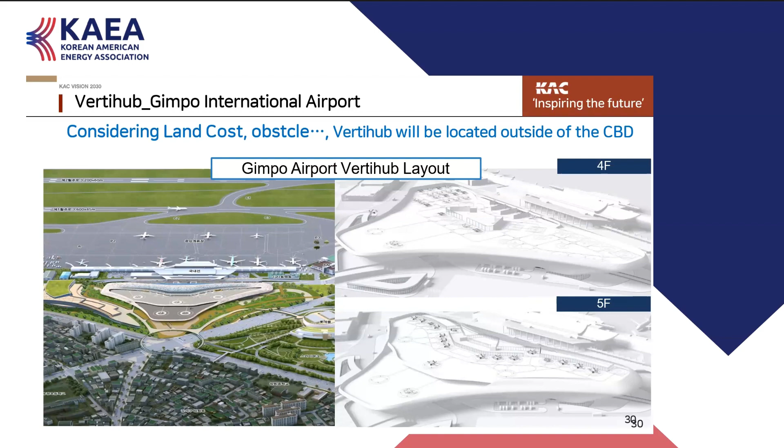And this will be the mobility hub in Seoul. It will combine all the transportation modes, including 5 subway lines, S-BRT, taxis, and express buses.

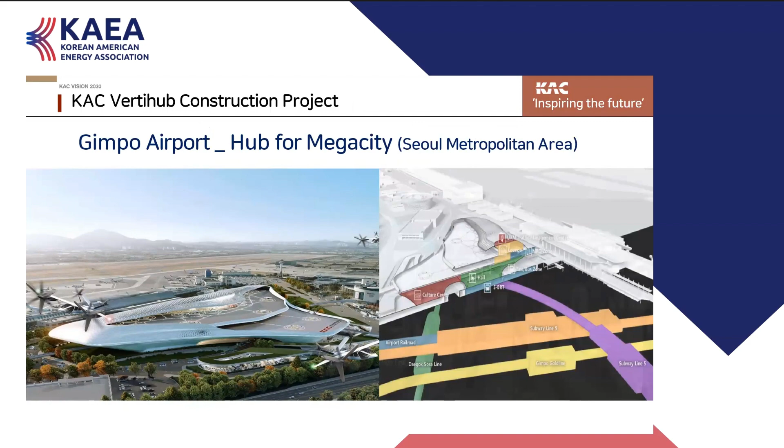It consists of 3 blocks. Block A will be the mobility hub, like I explained in the last slide, and it also includes block B and C. Block B will be the aviation cluster, and C will be the innovative mobility cluster, so that we can combine all the stakeholders and create synergy.

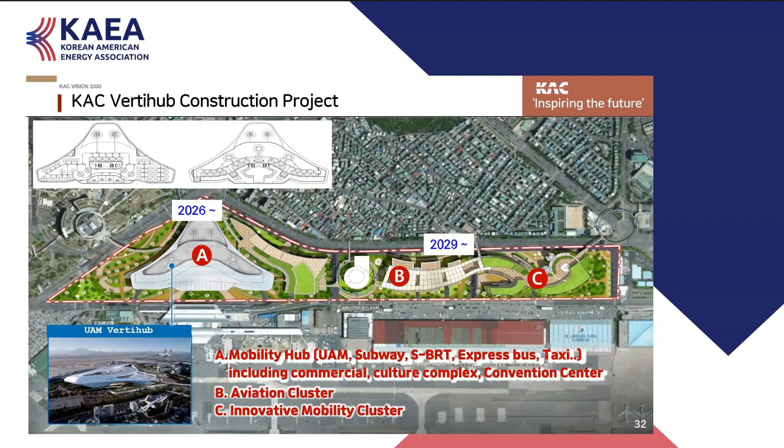Let's focus on block A, which is the mobility hub. We will use the rooftop for the vertiports and Verti hub, and from the underground it will combine the S-BRT and 5 subway lines. This building will also have a cultural park, commercial complex, and e-charging zone.

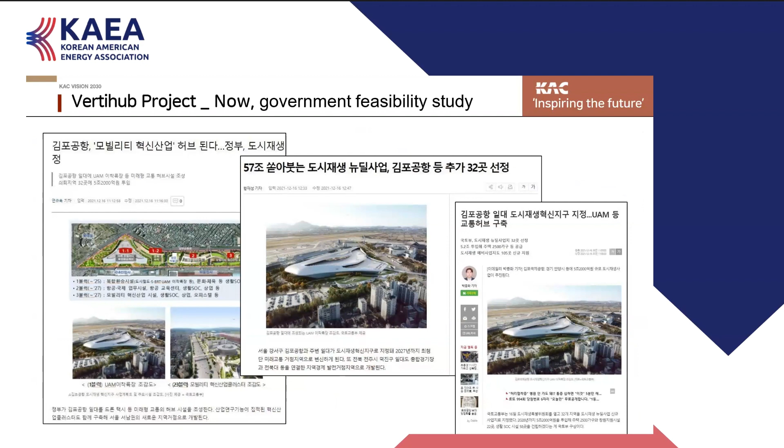And this is not just a picture. We are now undergoing the preliminary government feasibility study, and next month we will get the result from the government. This video clip is also about our Vertihub projects, and you can find it on our YouTube channel.

Let me explain how we think about selecting the Vertiport and stop site. For phase 1, we need to determine the UAM Vertiport quantity in the city, and for this we have to consider the UAM demand and government policy.

Next, phase 2, we need to select the UAM service area. In this space, we have to consider conversion demand and also other factors like geographical and demographical things, public purpose, complementary means of transportation, and induced demand. Lastly, phase 3, we can select the Vertiport location in the UAM service area, considering economic, technical, and social factors.

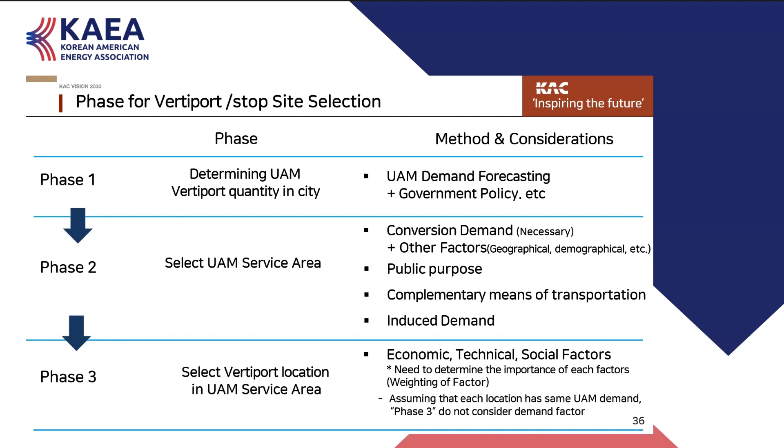So for the initial phase of the Vertiport and stop, we start from public land, because it's easy to secure land by negotiating with the local government. We are now cooperating with our local government, but in the end it can expand to various locations like intersections, rooftops, urban streams, highways, etc.

Can I stop my presentation here, because next is a description of the UAM system. Thank you for listening to my presentation. Thank you for your listening.